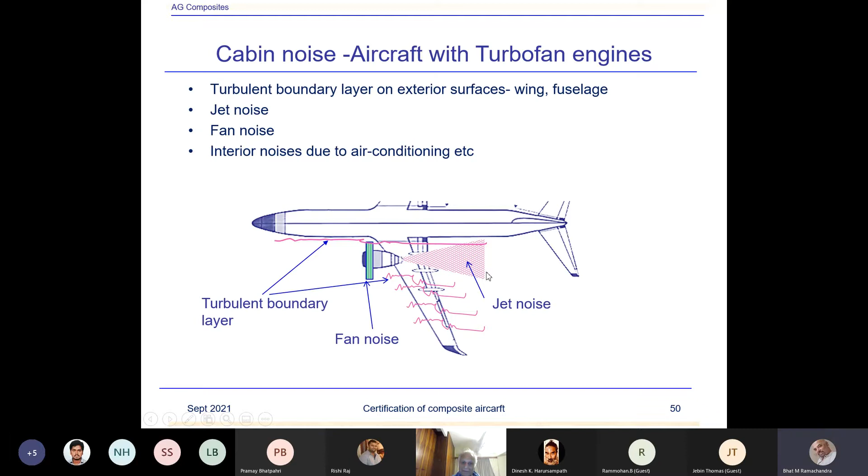Can you just explain a bit about what do we mean by surface density? Surface density is nothing but basically the mass per unit area. So composites will be about 0.7 times aluminum.

So what happens due to this? The skin is getting thinner. This is really quoting the Lockheed work which they had done about 30 years back. Is it about the thickness of the skin or about the area of the surface? Well, surface area naturally means if thickness is coming down, over a unit area the weight also will come down. So naturally that's what surface density means, correct.

So is this noise not dependent only on the area of the surface, but more about the surface density? Well, it is basically surface density, because there's a frequency function—frequency is a function of root K by M essentially. Yes, so that way it is a multiple effect, but this is what I've quoted in summary from the Lockheed work.

This is work which they had done almost 30 years back when investigating composite versus aluminum fuselage. I went into that report, and I can send you the references—there are two references which mention exactly this issue I'm talking about. I've taken only the abstract from that, so it's a real thing which has been done. And what they found was that they had to provide more acoustic lining for a composite fuselage than for aluminum.

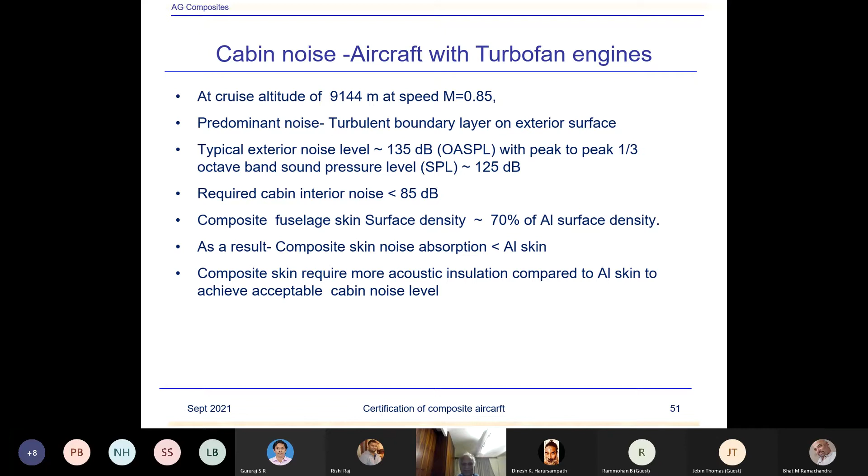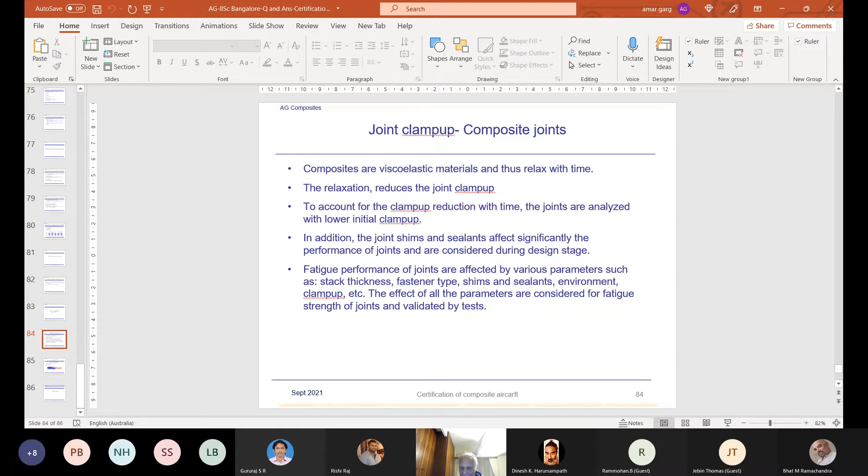The next thing was, someone had asked a question which I would cover when talking about bolted joints. I said the design of bolted joints becomes critical, especially fatigue, which we found more critical, and we have to ensure the fatigue life. After a lot of experience with joint designs, I would always insist any bolted joint in composite should be designed with a fatigue criteria.

That's what we found. The question was regarding a slide on the fatigue issue of the joint - whether it's due to the clamp up. Yes, clamp up, but it's taken into account. When doing static joint analysis, we consider the reduced clamp up, validated by test data. We determine the bearing strength using tests with reduced clamp up, usually around 50%, or sometimes lower.

Based on that, bearing strength level is determined and used in static analysis. But when fatigue analysis is done, fatigue joints are tested, and there's no analysis criteria available. In fact, fatigue life prediction for bolted joints is difficult. You may have to determine empirical relationships to get the fatigue life, based on test data with various parameters.

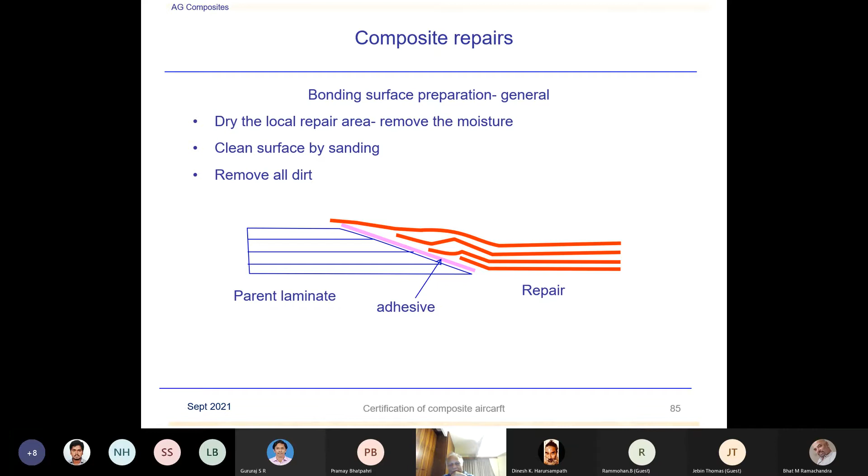That convention I don't remember now, but an appropriate sandpaper will be used to sand it, then remove the dust and lay the adhesive. I can't mention all the processes here, but there are procedures given to the airline for how they will repair when there's damage. I'm not going into the details of this one.

I thought I'll just clarify that. So this is all, unless somebody has questions from the previous lecture before we proceed.

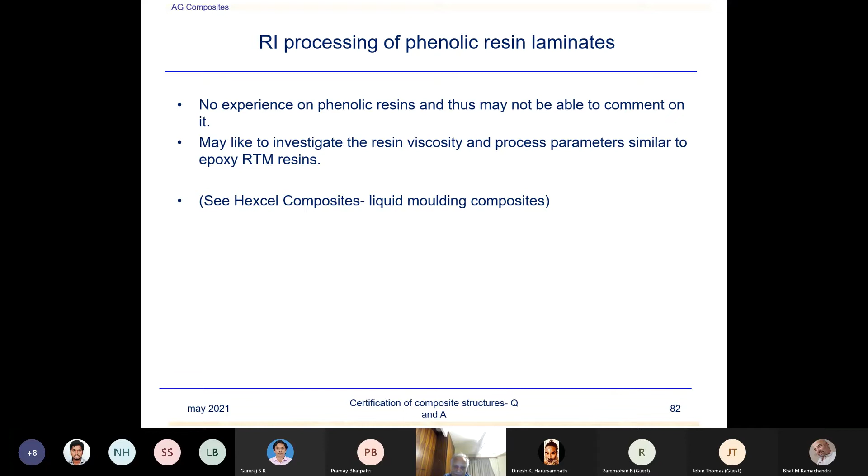No, let me just go to the certification topic. I think last week we had finished up to these various manufacturing defects.

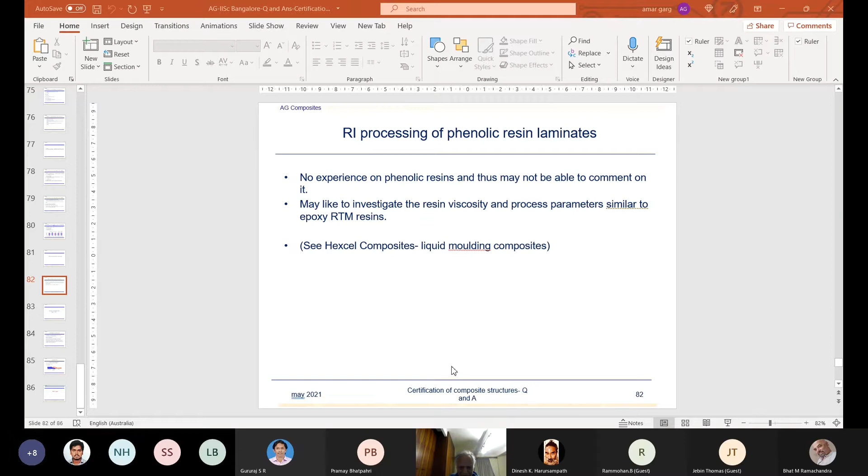Did I cover this slide last time? Anybody? Oh sorry, you can't see - I have to just share this tray. Okay, can you see this slide now? Yes, yes, manufacturing defects. So did I cover this last time? I don't remember.

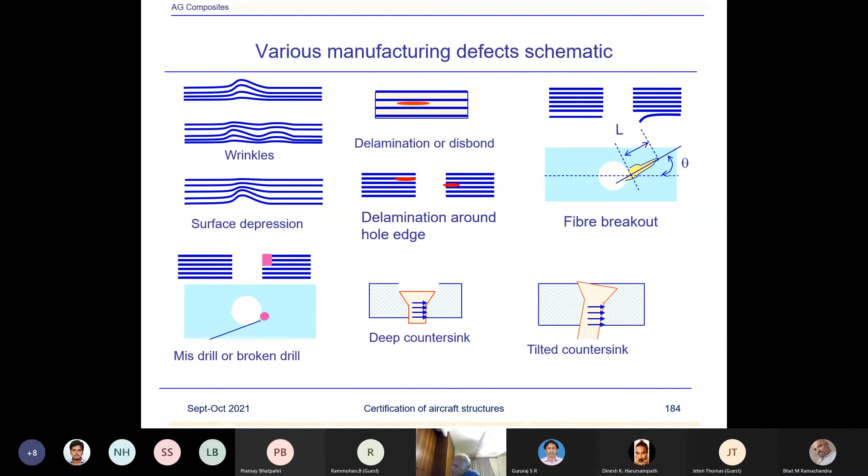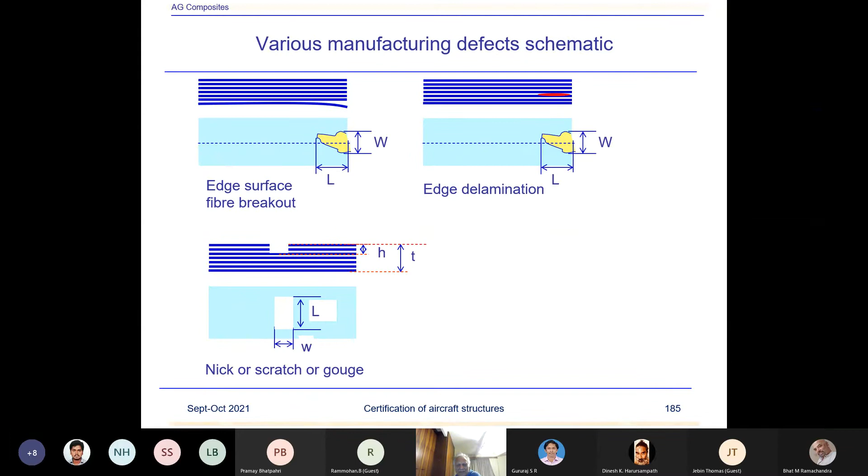Around slide number 190 you have covered, sir. Oh, so I had covered this, is it? Yeah, I think so, because I said okay I'll cover this, start from subcomponent test.

Yes sir, yes sir. Okay, now after finishing the coupons, the levels, coupon, element test, now we consider subcomponent. Subcomponent is basically a detail of a structure involving a few more details compared to what you have with a coupon or element. So essentially it's a bigger item, a bigger part of a structure - subcomponent.

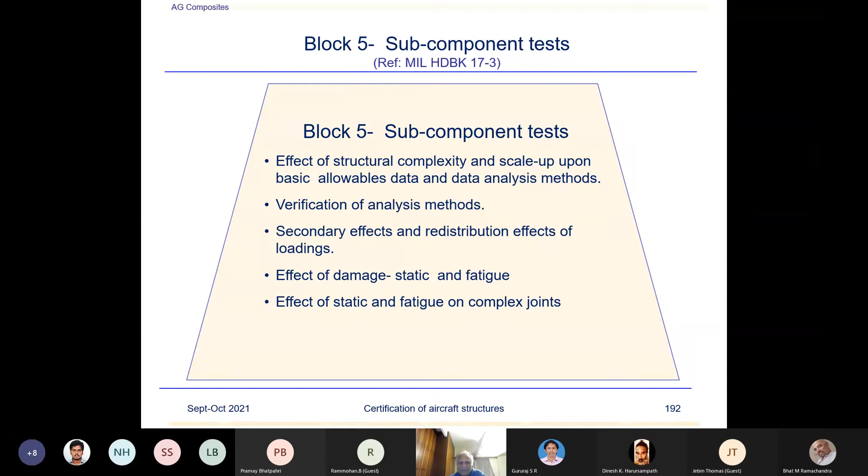So the effect of structural complexity and scale-up upon basic allowables data and data analysis methods, verification of analysis methods, secondary effects and redistribution effects of loadings, effect of damage - static and fatigue - on complex joints. So the first thing I'm trying to discuss here is the lightning strike effect, which is an important part of certification because there's a requirement.

14 CFR 25.581 for lightning strike states that the airplane must be protected against catastrophic effects from lightning. For metallic components, compliance with paragraph A of this section may be shown by bonding the components properly to the airframe, or designing the components so that a strike will not endanger the airplane.

For non-metallic components, compliance with paragraph A may be shown by designing the components to minimize the effect of a strike, or incorporating acceptable means of diverting the resulting electrical current so as not to endanger the airplane. The difference between metallic and composites is that composites are basically non-conductors, while metal - aluminum - is a conductor. That's what makes it a different scenario for lightning strike protection in composites, which have to be protected against lightning strike causing any damage.

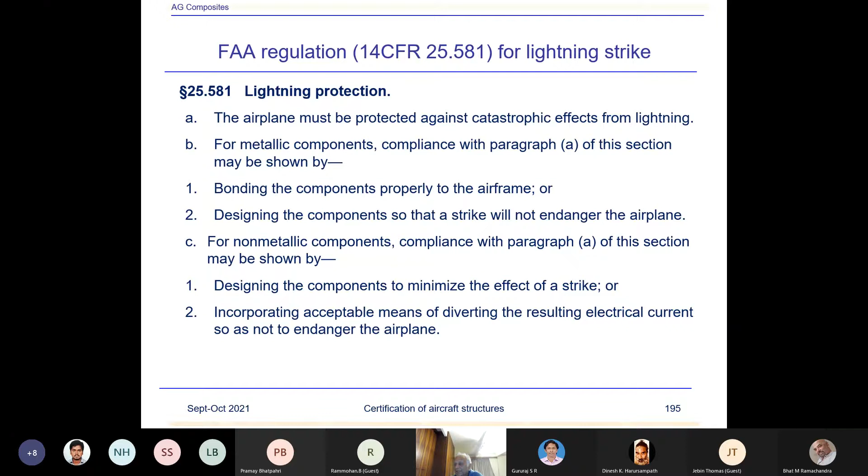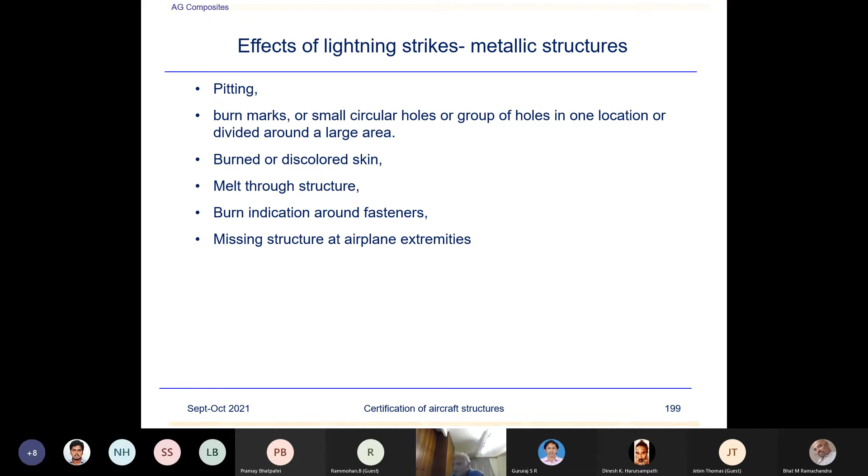The effect of lightning strikes on metallic structure is normally pitting, burn marks, small circular holes or groups of holes in one location or divided around a large area, burned or discolored skins, melt through structure, burn indications around fasteners, or missing structure at airplane extremities. Normally metallic structures don't suffer as much damage as composites.

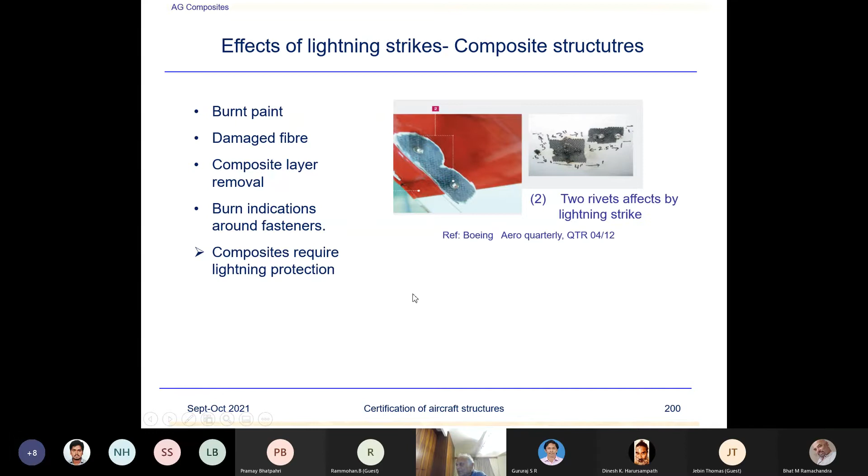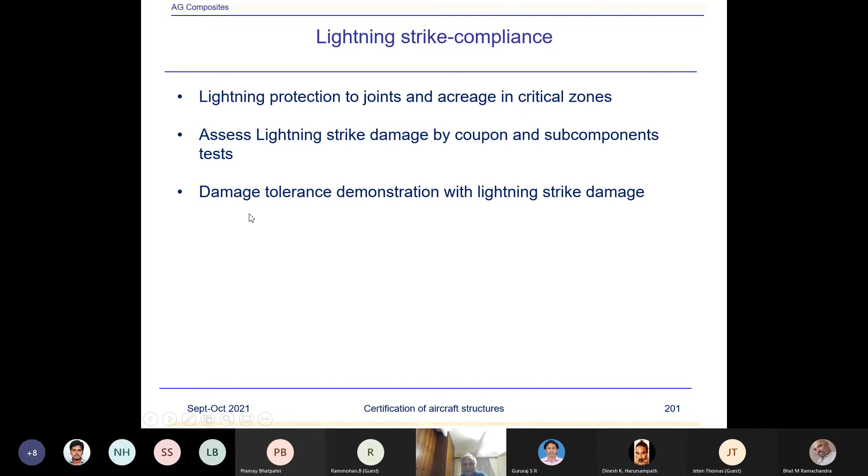Lightning strike compliance is done by lightning protection at joints and acreage in critical zones, assessing lightning strike damage, coupons and subcomponent testing, and damage tolerance demonstration of lightning strike.

One of the key areas of lightning strike protection is the fuel tanks, because fuel is located all around the wing, and there's a strict requirement for lightning protection criteria so that the fuel doesn't burn, because there are fasteners which can conduct and create a flash inside the fuel.

So, lightning strike test - during the 787 program, because this was a new type of structure at the time, we had to perform the test for lightning strike to see what kind of damage it would create. This test was done in Seattle, because in Melbourne we don't have the facility for lightning strike testing.

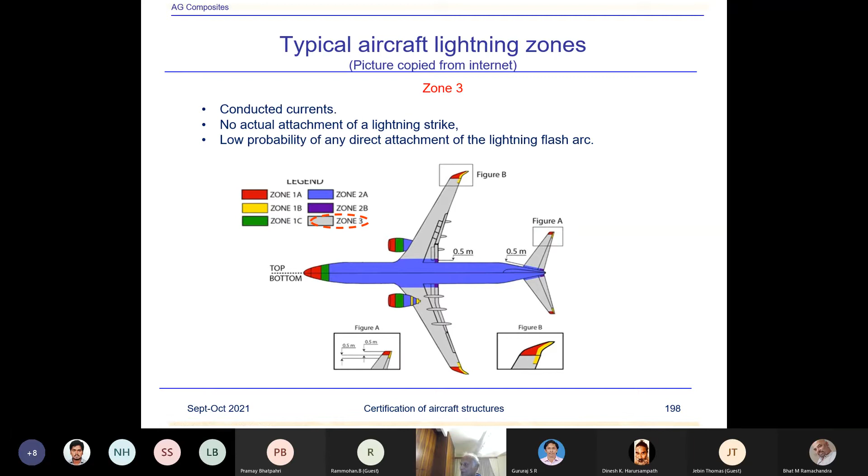In some regions, like these flaps, because they lie in zone 3 which is not a very critical area, no lightning protections were required in the flaps. However, we had to determine, in case something happens, the damage resulting from lightning strike, and also for these fasteners.

Normally, lightning hits and damages the fastener in service. There have been quite a few cases when lightning has affected these fasteners and created damage in the trailing edges of these flaps in service.

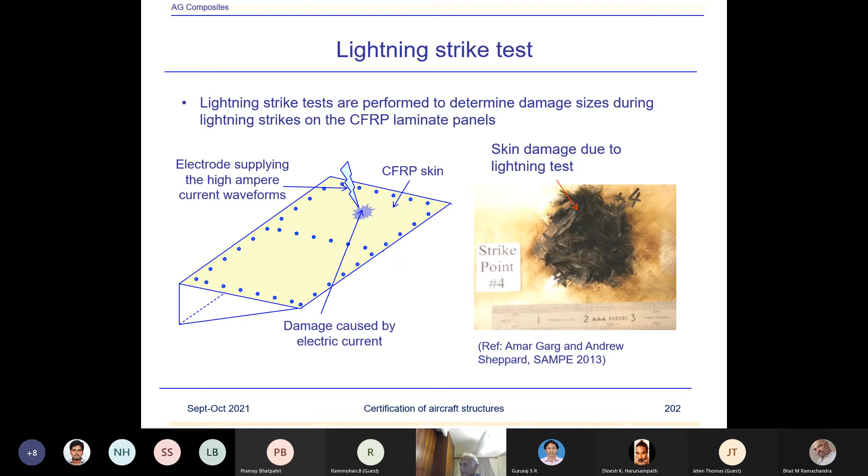So when the damage occurs, the airlines would contact Boeing, or if the damage is within limits prescribed by the repair manual, they will repair it themselves; otherwise they'll go to Boeing and Boeing will provide the solution for the damage repairs.

Next is the bird strike damage. This is a very important part of damage tolerance, and every year some bird strike damages occur for airplanes around the world. I'll just put up a picture and superpose some birds over here - it's not a real thing.

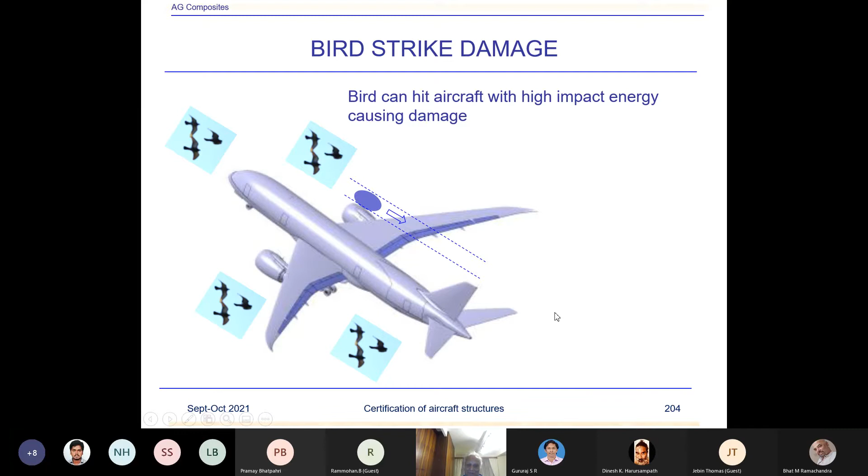Criteria for a bird strike requirement is damage tolerance evaluation: the airplane must be capable of successfully completing a flight during which likely structural damage occurs as a result of impact with a 4-pound bird, when velocity of the airplane relative to the bird along the flight path is equal to VC at sea level or 0.85 VC at 8,000 feet, whichever is more critical.

This has to be demonstrated for the structure, and we had to demonstrate it. I'll show you some slides over here.

Another criteria for bird strike damage, 25.631, is that the empennage - the horizontal tail and fin structure - must be designed to assure the capability of continued safe flight and landing of the airplane after impact with an 8-pound bird. This is double the 4-pound bird requirement, which is a severe damage requirement for that type of structure like the empennage structure.

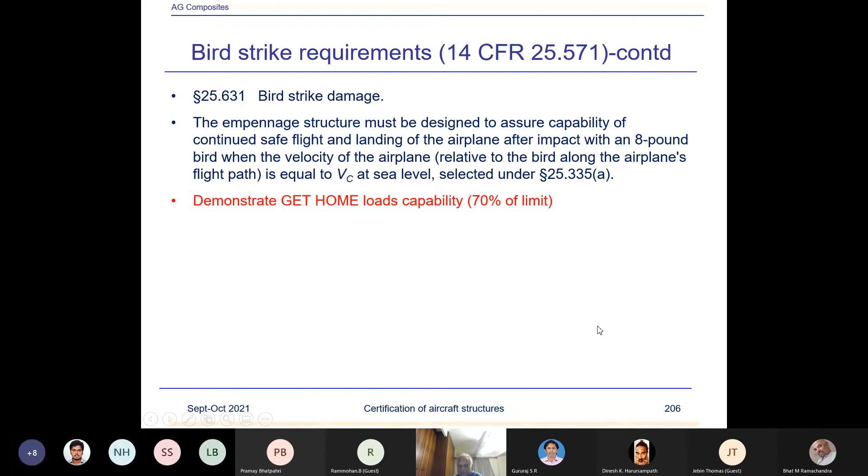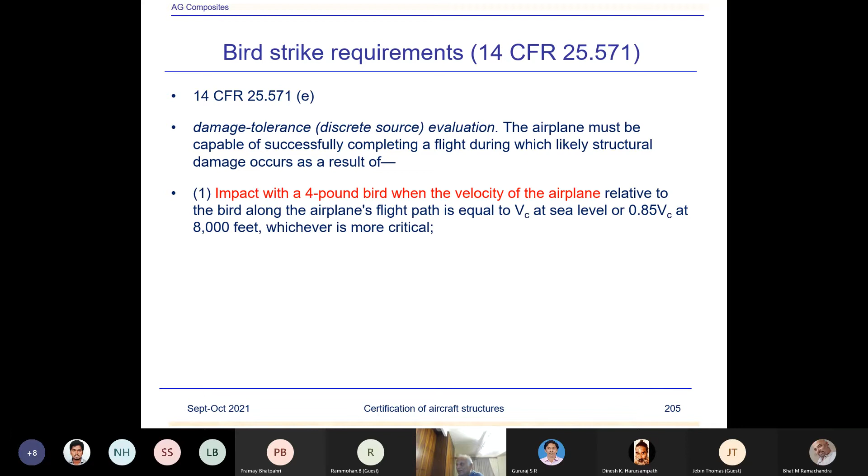So this has to be demonstrated again for empennage structures. For our structures, the requirement was a 4-pound bird. Although, depending upon the case, suppose industry wants to go ahead with a larger bird to show compliance - which is not required by FAA, but to show a bit more safety margin - then probably industry will choose to go higher.

Okay, now, what is the compliance philosophy for bird strike damage? It has to be validated by test.

However, tests are expensive, so a lot of work has been done by the industry and by universities, and some softwares have been developed like PAM Crash, LS-DYNA, MSC Dytran, which simulate the bird strike damages to determine the effect on the structure due to the bird strike, how much damage is created, and what is the remaining strength or residual strength of the structure.

You can just search in the literature and you can find these softwares and a lot of work done by many of the universities and the industry to understand various packages. In fact, recently, Boeing has been doing work for the NASA contract because there's an open literature at NASA website.

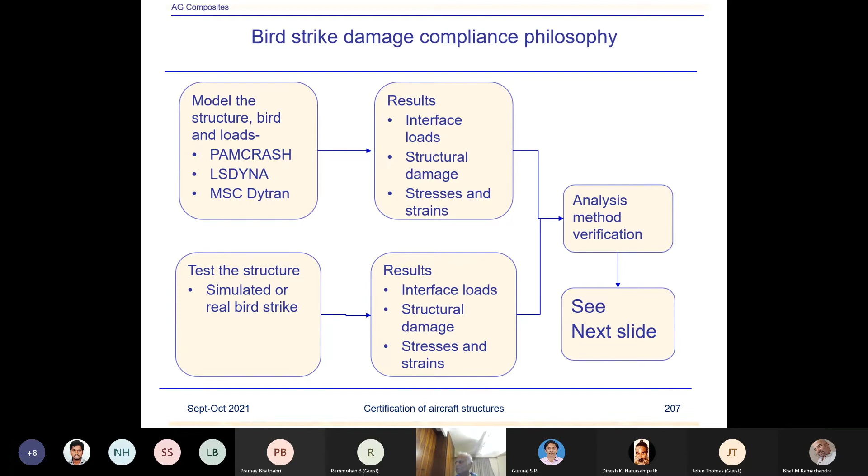Once you have done that, of course, then analysis method verification, then you can apply this method to other zones because you can't test every region of the structure to understand the impact damage due to the bird. See the next slide.

So previous slide, develop equivalent cannonball damage. Now, what cannonball damage is, I'll show next slide. Simulate damage to the structure, residual strength, and margin calculations.

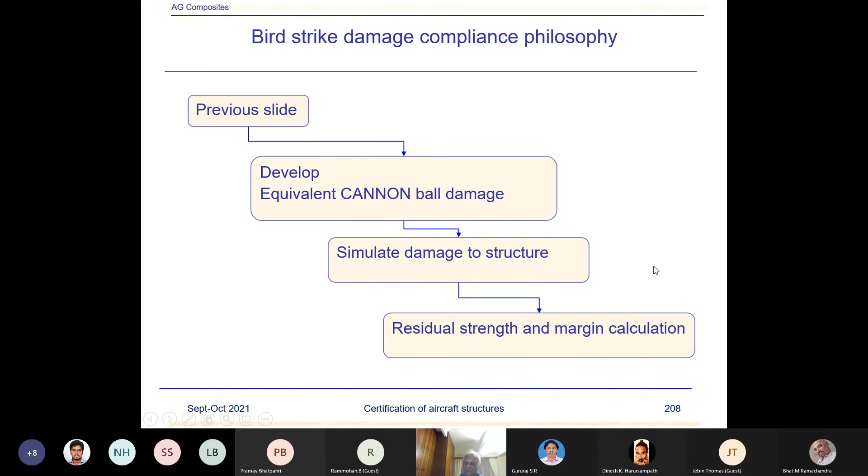Okay, now this work was done by Boeing and the Cooperative Research Centre in Melbourne long back for the 787 program. However, I could present this because it's an open literature, a published material. It was done by my colleague Steve Georgiadis. He's also retired now from Boeing.

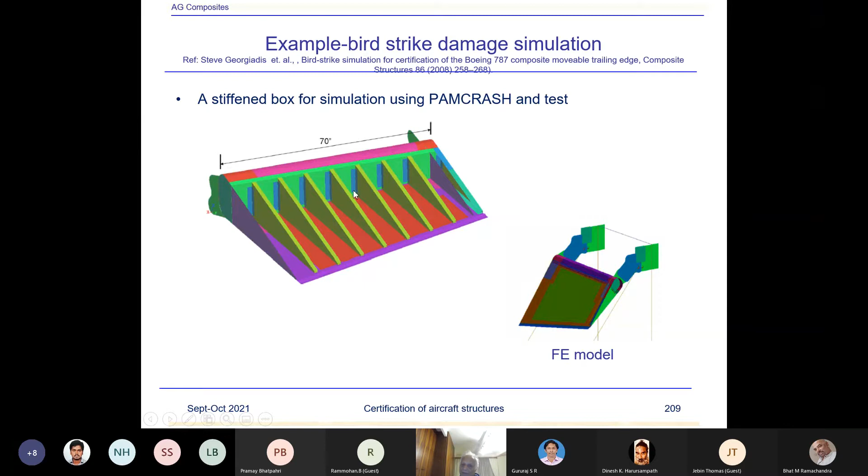So at that time when PAM Crash was used, PAM Crash has been used significantly by Europeans. This was a software used in order to simulate the bird strike damage. So a box, like a 70-inch box with multiple ribs, and the spar was fabricated and modeled also, as you can see over here. And then the test was done in Seattle for the 4-pound bird strike, which was a simulated bird, gel pack.

As you can see here, when the bird was struck, that's a simulated bird. The real damage to this box over here, this is the damage denoted, and PAM Crash simulated damage, you can see. So that was fairly a good simulation by PAM Crash of this damage. Lower skin, this is the damage, and simulated damage. So pretty good correlation they could generate between the test and the software, which provides the confidence in the analysis.

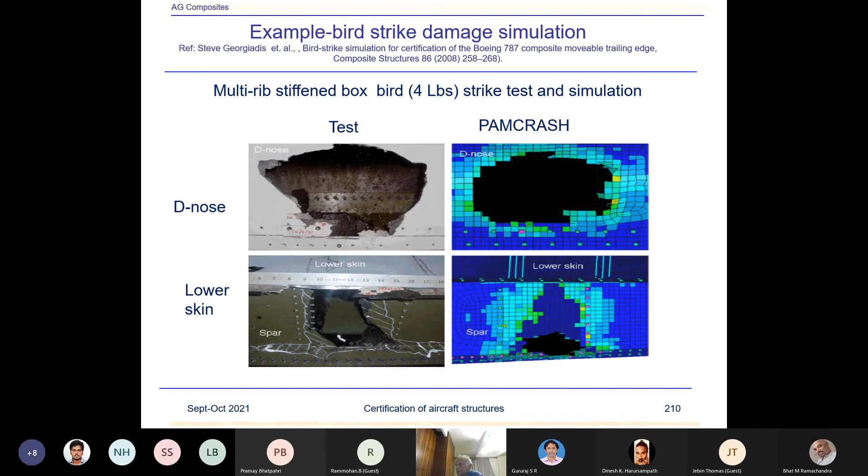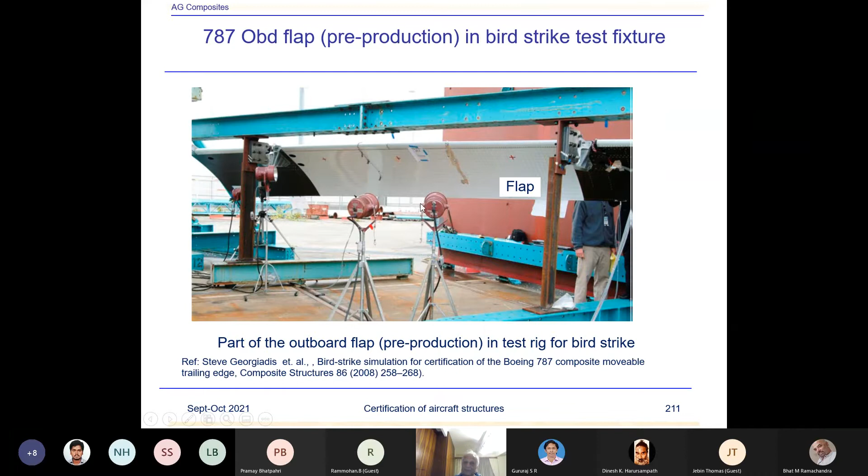I'll show in the next slide, when showing a component, the same flap, another production flap was tested with a bird, the real bird. This was a simulated bird, a gel pack, but I'll show you the real bird test later on.

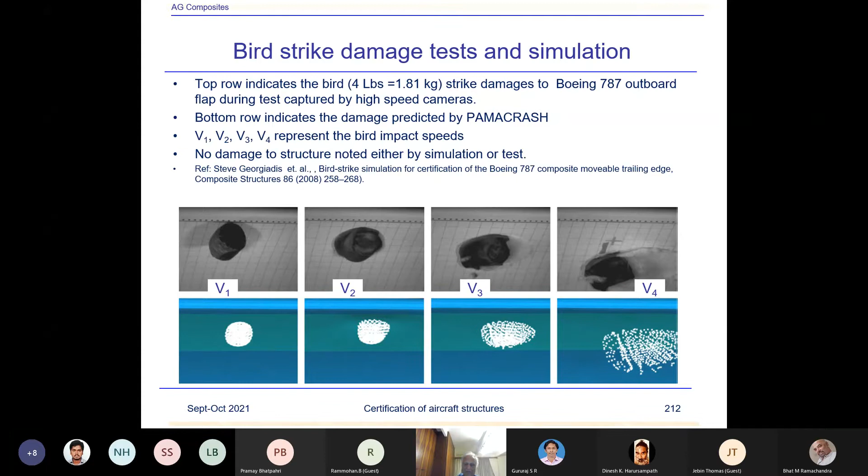In practice, depending upon the probabilities of the angle at which the bird can hit the structure at various angles of attack and bird strike paths, simulation will be done to determine how much structure could be damaged. Suppose the bird hits with greater impact, it just takes away all the material. So this is the cannonball approach: we simulate the known path for different parts of the bird and remove the structure, or simulate the damage created like a cannonball.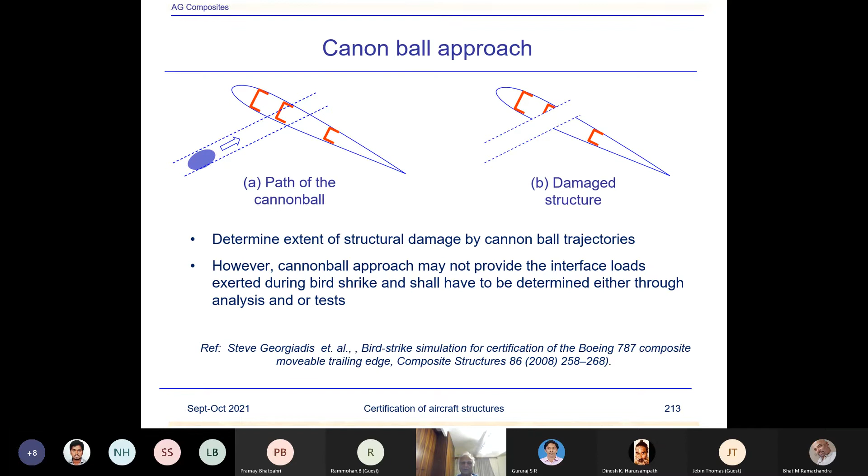Then we analyze it. The remaining structure is analyzed by finite element methods, and you determine the residual strength to satisfy the damage tolerance requirement, which requires 70% of the limit load plus 40% of the gust, all those criteria under 25571E, which I presented in my previous slides in these notes.

Another part of the cannonball approach covers various damage scenarios, basically when the bird just goes away and slips, creating damage at other places. All these scenarios are investigated and analyzed in order to show compliance for bird strike damage to the structure.

This requires a lot of analysis and significant effort, because for each structure you have to model the damage at various places. Considering the flap, we model the damages at various places using finite element methods, because hand analysis or empirical methods can't determine this. Finite element methods remove the structure and then determine the stresses and strain near the damage, using some failure criteria like a point stress criteria, which I'll discuss during my damage tolerance philosophy, to determine the margins.

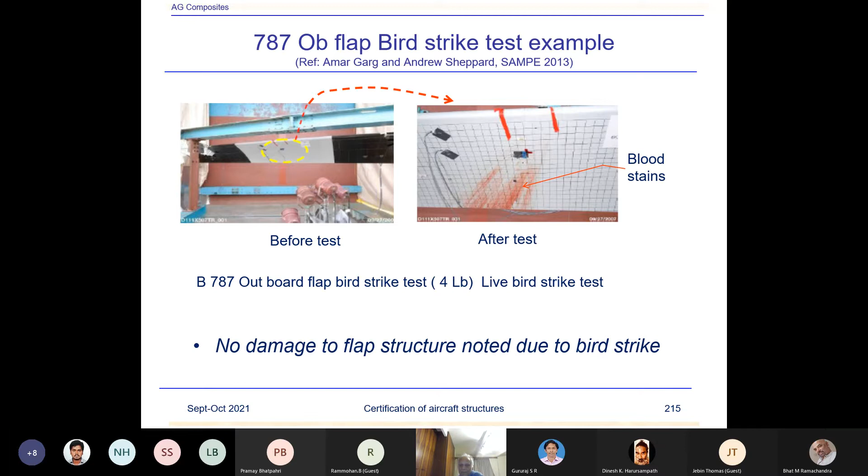Only this outboard flap was tested, and based on similarity of the substructure and structure, other components like ailerons and inboard flaps were also certified. In addition, the cannonball approach was followed to demonstrate compliance of the structures.

Any questions so far from the audience? It's very quiet.

Dr. Garg asked: regarding bird strike effect on a composite structure, by thumb rule, is it most severe when it hits normal to the surface or at an angle, with the same mass and velocity? The response: usually the impact energy will be lower if it is at an angle compared to normal.

So what about the reaction from the structure? Yes, there would be a reaction to the structure, but I can't quantify that, because when the bird hits, it creates an impact, and one has to consider whether it will fail any hinges or fittings. That has to be evaluated through impact energy calculations to see what the reaction change is. I won't be able to give the exact magnitude or effect, but it's an important consideration that the fitting should remain intact due to the large energy created by the bird strike.

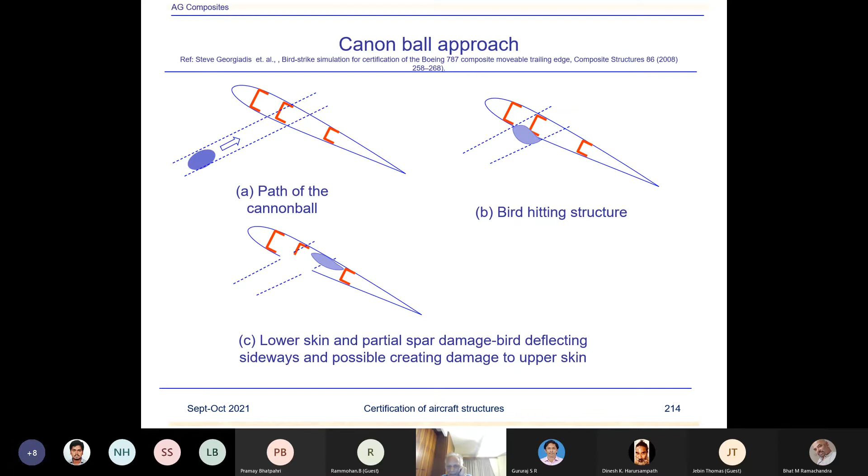The next part is sonic fatigue, the sonic fatigue requirements and strength. It must be shown by analysis, supported by test evidence or by the service history of airplanes of similar structural design and sonic excitation environments, that sonic fatigue cracks are not probable in any part of the flight structure subject to sonic excitation, or that catastrophic failure caused by sonic cracks is not probable, assuming that the loads prescribed in paragraph B of this section are applied to the areas affected.

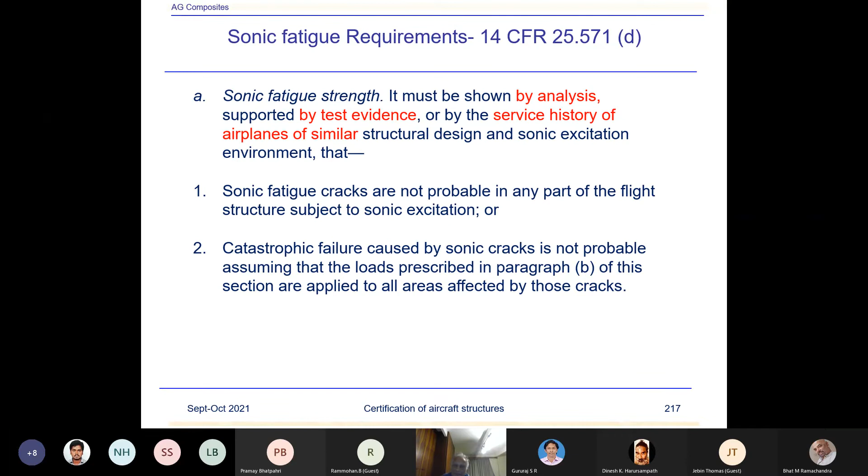Okay, so this is the criteria. Essentially, you have to demonstrate that the high cycle fatigue vibrations do not cause damage to the structure.

We had to investigate sonic fatigue compliance using test data. Essentially it's a random noise, low amplitude, high cycle load, which could run into several millions over the lifetime of the aircraft.

Now, cause and effect of sonic fatigue. For aircraft parts in the vicinity of jet engines, there's noise vibration - high frequency random pressure fluctuations of the acoustic type created by turbulent mixing in high speed jet efflux or turbulent boundary layer. Acoustic loads created by oscillating shock waves, shock turbulence interaction in the jet stream, may radiate high intensity noise.

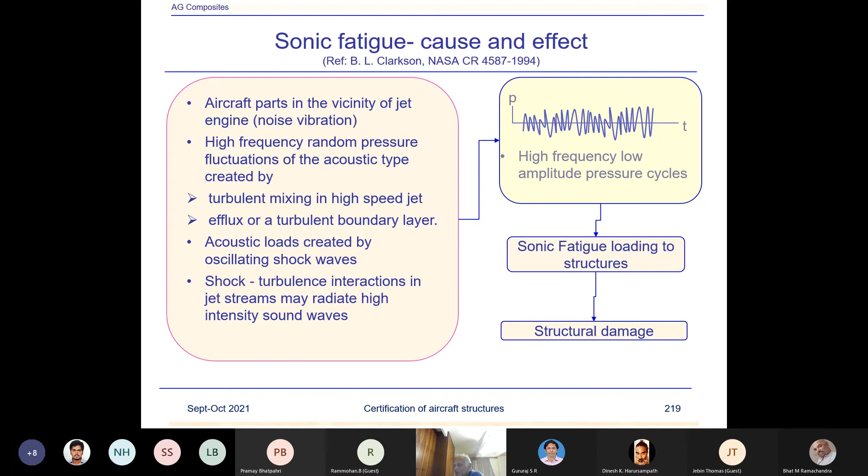Can I just, excuse me, I need some water. Let me just get water. Please go ahead.

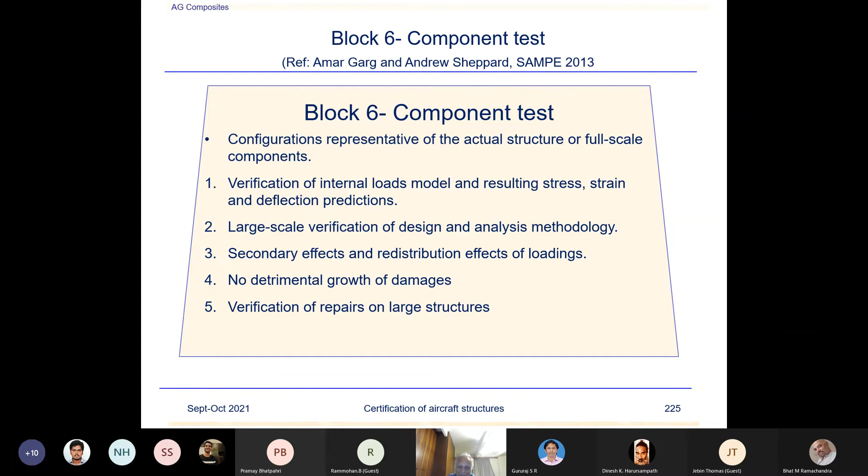So, test article general features. The test article is a production-type article. When the test articles are created, they have to be produced under the production environment, following exactly the production process which will be used for delivering the product to the airlines. There won't be any change in the production process used for testing. So the same process going into production of the component is used.

This simulates the realistic process anomalies, to demonstrate that any undetectable or detectable damage does not propagate or create a detrimental effect on structural integrity. So production anomalies like disbonds and delaminations were created at the time of manufacture, because that is a compliance requirement. We have to consider any damage which is undetectable that could occur during production, like delaminations or disbonds, and then incorporate BVIDs and VIDs - barely visible impact damages and visible impact damages - to validate no damage growth. That is a criterion of the structure.

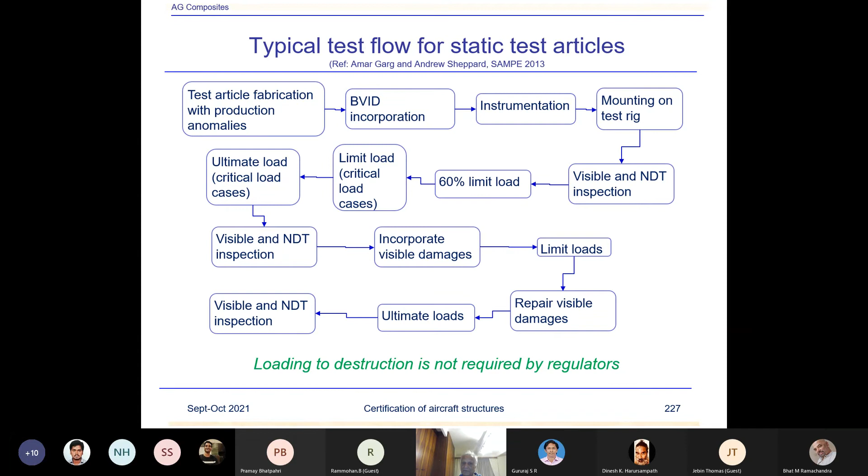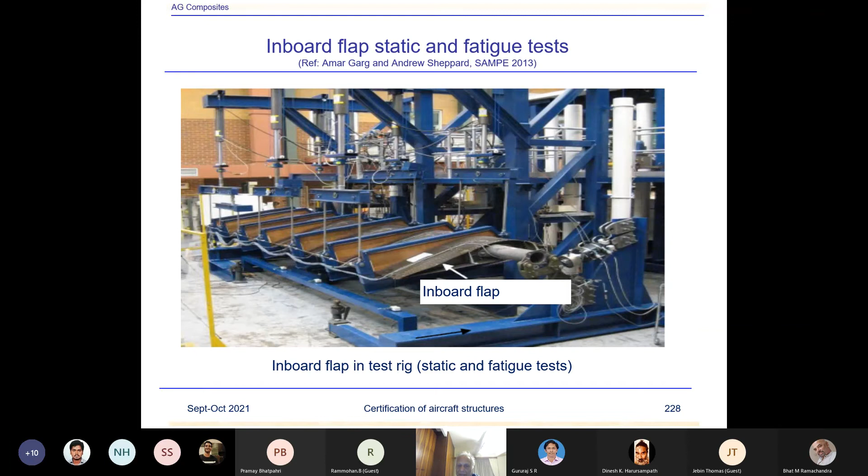Okay, now, so what do you do? This component was installed with dozens of strain gauges on the skins. Some gauges were back to back also to demonstrate the buckling. Then LVDTs to read the deflections.

And the results are for a certain gauge. This is just some typical reading, one slide I've taken from our actual structural data which is published. We could not show the real strain values here, we were not allowed to show any strain. So what you can see here is the test versus analysis.

Predictions of skin strains agreed well with test data, verifying the analysis methods. The requirement was very stringent about matching the strains of the test data to the analysis within plus minus 5%, which is not easy, let me tell you.

For a larger structure you are analyzing, the skin strains could behave quite differently in your analysis than in the test. Right. So what happened really during the analysis and testing program? We got the test data, and test data in some locations were deviating more than the required matching agreement between the test and analysis by more than 5%.

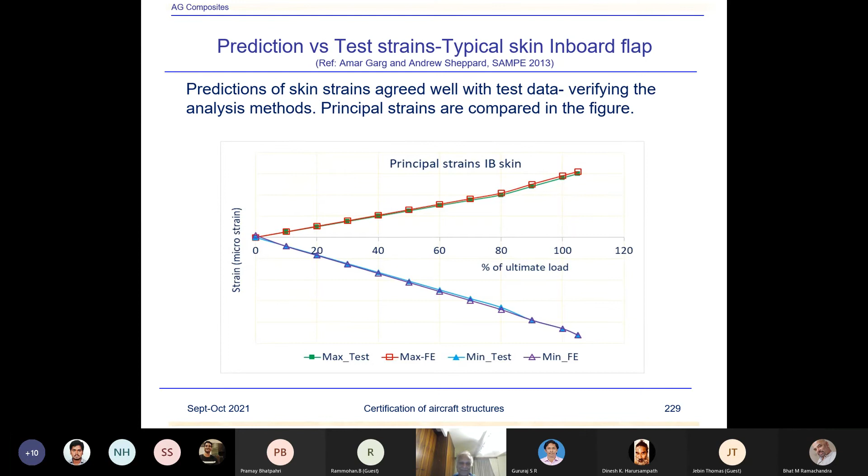Next one, the displacements. Using LVDTs at various locations, the trailing edge and leading edges, because you predict the deflections using finite element methods, and then using the test.

What happens when you are using a finite element analysis? There could be differences because the stiffness which you are representing using the finite element methods may not be exactly the same. The laminated stiffnesses could differ from one point to another, and that will change the deflections.

However, again, the requirement was within plus minus 5% for the FAA requirements. Engineers had to work in order to match the stiffnesses exactly to what the test was showing versus the analysis. And you can see the result, they're pretty good.

So our engineers at the time had done a remarkable job in analyzing the sophisticated structures and matching the test data to provide full confidence in the analysis methods, which is an enormous task.

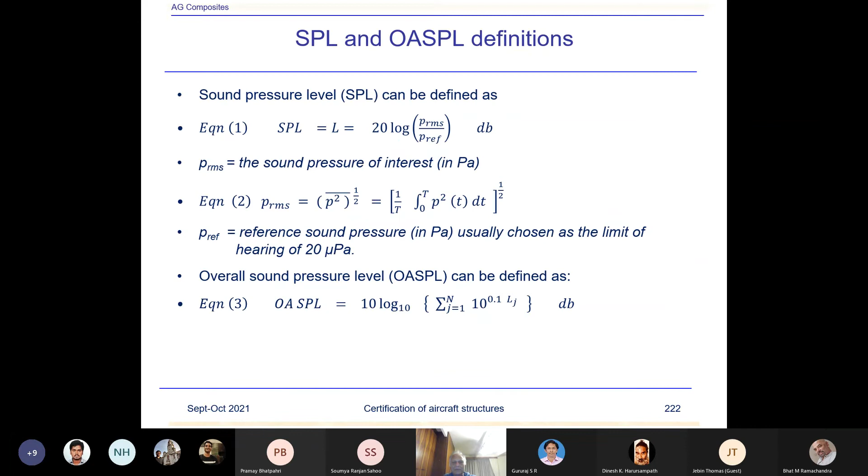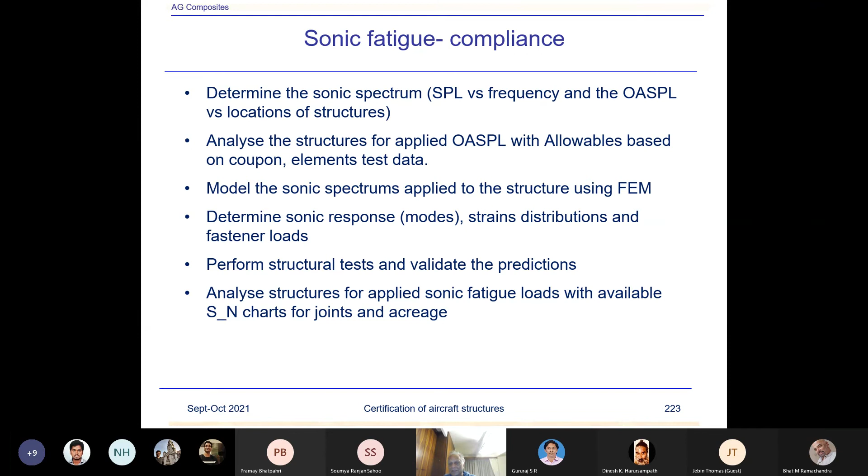Because analysis-wise, what happens in sonic fatigue, actually I have not put any details over here because there was no time to put lots of details, I've taken it away. So essentially, sonic fatigue, say, suppose we are dealing with this flaperon over here. Due to this, it creates vibrations. Now these vibrations which are there, low pressure, high cycle vibrations, it's a fatigue loading essentially. So you have to generate...

using a sonic spectrum the amount of loads which are being created. Fatigue load is essentially converted to the fatigue load, the pressure distribution in various zones. And that fatigue load is compared for the fatigue endurance limit using the stress fatigue diagram, stress cycle diagram.

I could provide some notes in the question answers next week to discuss a few more details. But there's a lot of work in this sonic fatigue compliance.

But imagine a situation, it's like a mechanical fatigue. We have the loads, so you generate from this sonic fatigue the loads, you convert these pressure cycles, or what we are calling sonic OASPL. So in terms of the loads, it can convert to pressure distribution or this stress. And number of cycles for which you have to show the compliance, and then compare with the SN chart if you have for that part, for that high cycle fatigue. So essentially, it's a fatigue problem.

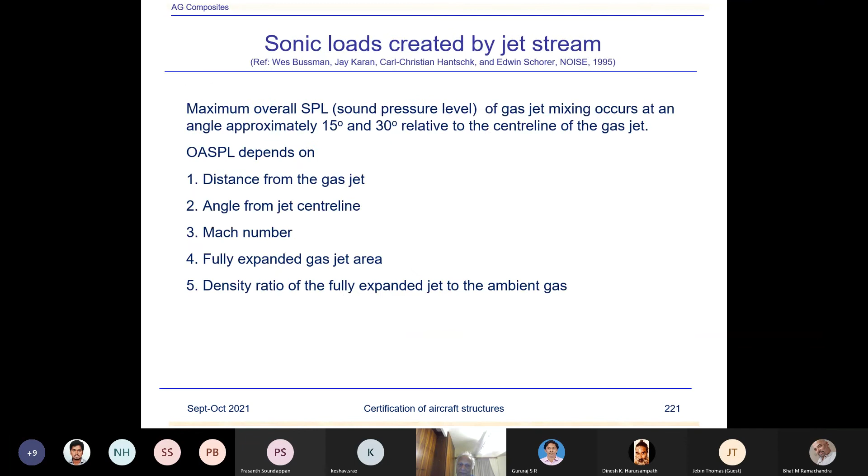So these tests were done considering the overall pressure, sonic pressure levels. I said I can send some reports, NASA references on sonic fatigue, if somebody is interested, high cycle fatigue.

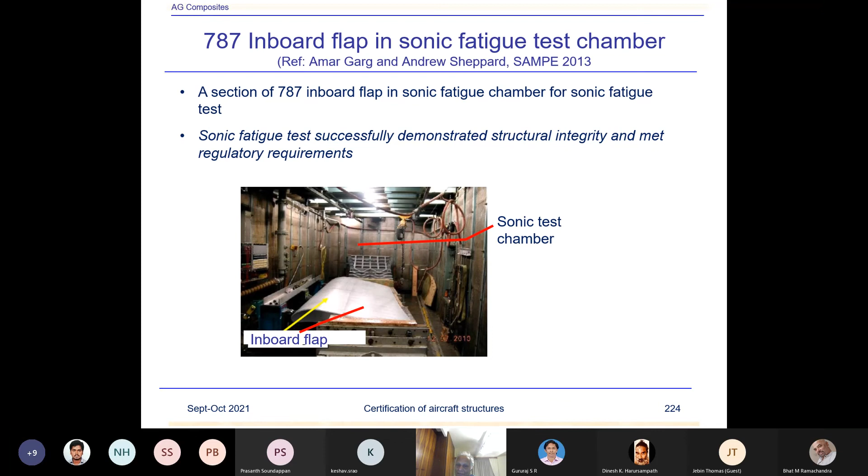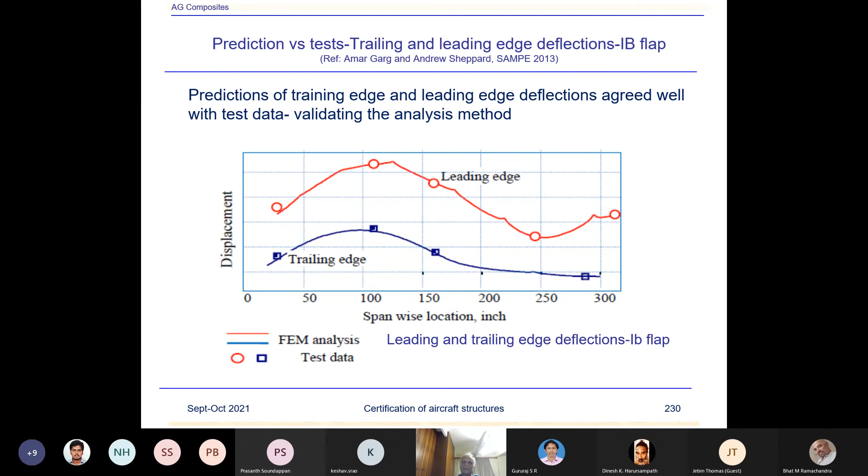So I was discussing this, and essentially what I said, that analysis confidently showed that the test matched the analysis data, so confidence.

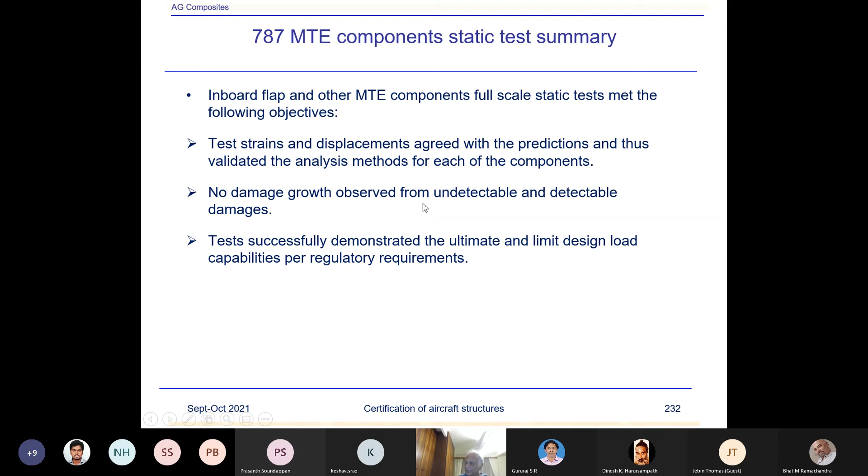Capabilities per regulatory requirements are satisfactory. They satisfied all the compliance requirements.

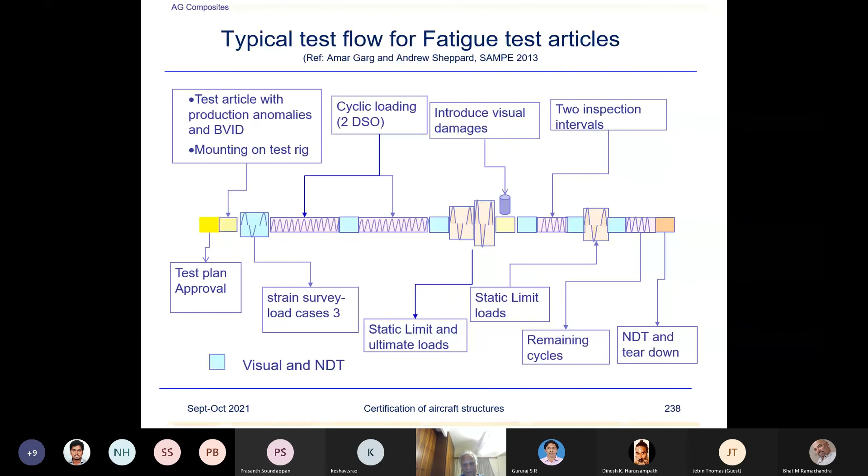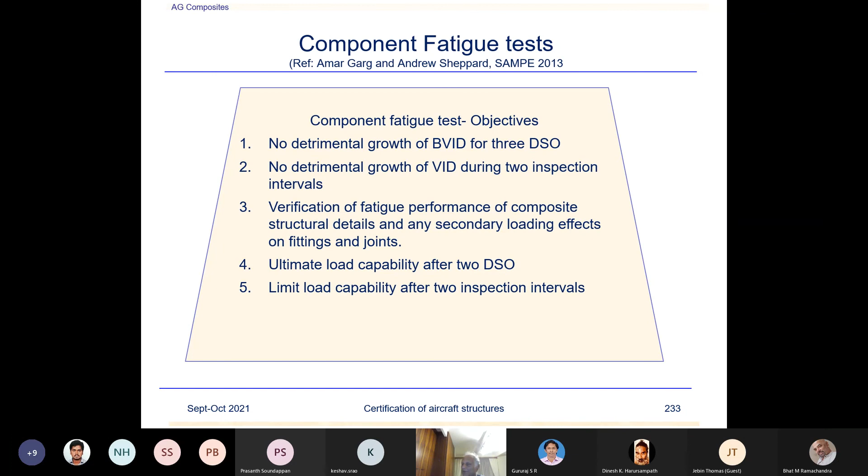Fatigue test showed no detrimental effects. I think this may require a bit more discussion on fatigue, so maybe I'll spend about half an hour next week to finish off this fatigue test. I can stop here today and invite questions if anyone has any.

Any questions? Dr. Garg: Yeah, yeah, a fantastic series of lectures on all these topics, very valuable and not easily available elsewhere. So thanks for this.

I have a general question. All these aspects covered so far refer to the MTE, the movable trailing edge, I presume. Is the philosophy more or less the same for other structural and composite components, maybe with a little variation here and there? Response: the compliance philosophy is the same. I picked this example because I worked on this MTE structure, but the certification philosophy for wing, empennage, or fuselage is similar - same requirement.

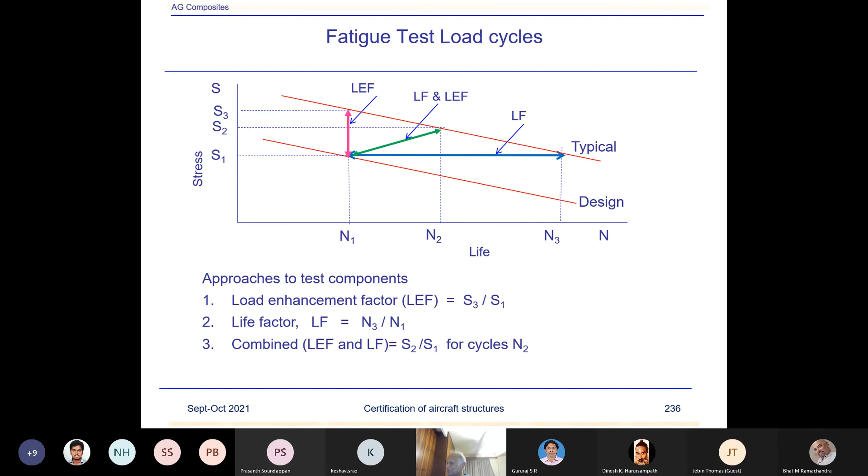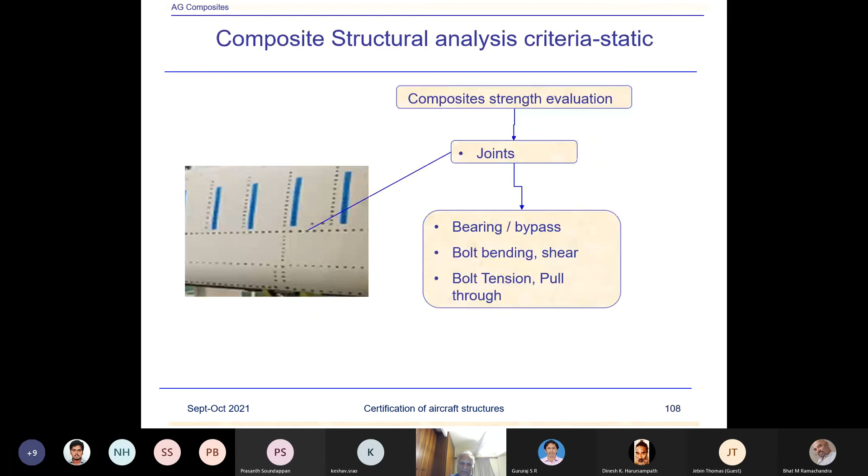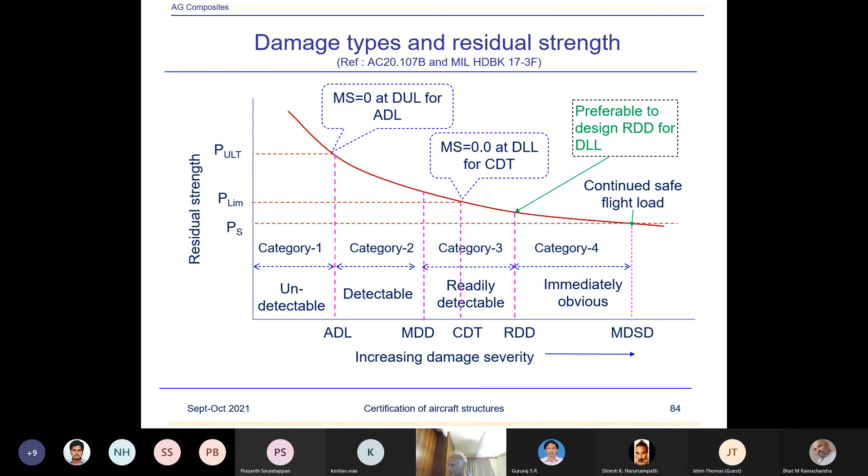Essentially, the main requirement comes from damage tolerance, which is what I've covered here. Let me go back to this diagram - essentially we have to cover whatever structure, demonstrating the structure's capability with undetectable, detectable, and immediately obvious damages. This is what I've tried to cover in this lecture series - that certification philosophy is to show the safety of the structure, and safety of the structure is from the damage tolerance point of view.

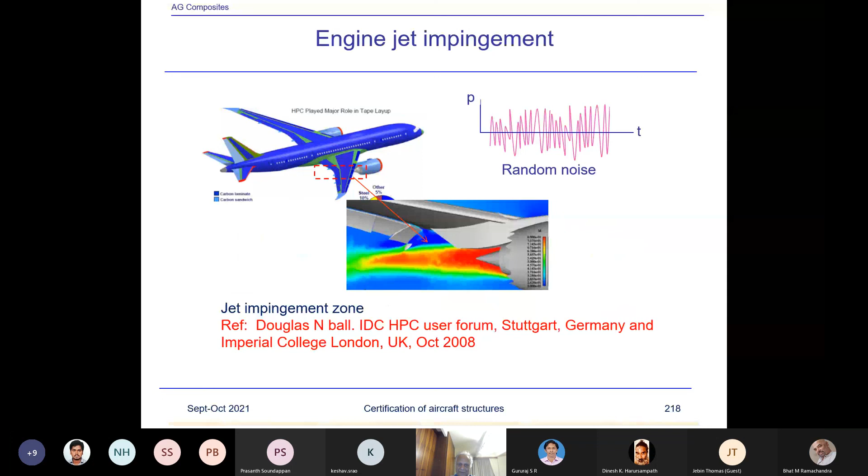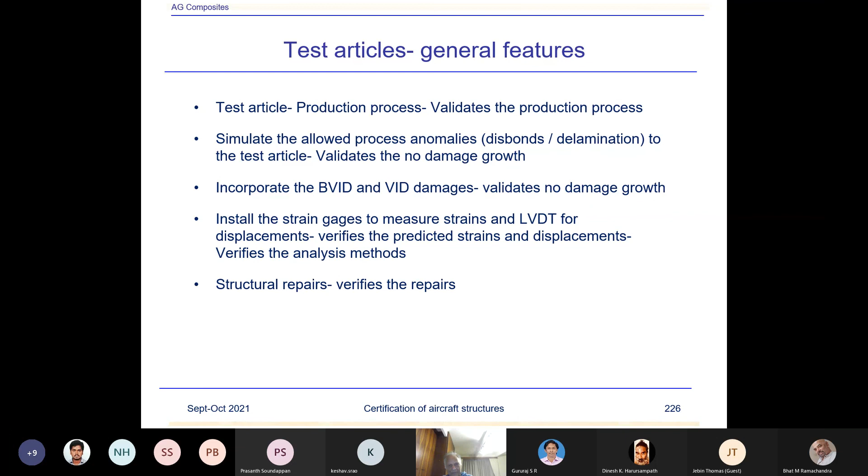Any other questions? One action item on me is to put some more details for sonic fatigue, and I'll send some literature on that - cabin noise.

Anything else? Any other questions? One quick question, Dr. Garg again - we were talking about visual inspection and NDT inspection. I work in NDT. I was wondering if we have more information on which methods are of high importance or utility - is it ultrasound contact method, or eddy current, any idea on this?

Well, generally on composite structures we don't use eddy currents - it's mainly ultrasonic testing. Various different types of ultrasonic inspections are done to detect damages. These methods have the limitation that you can't detect damages below a certain limit, like a quarter-inch delamination or disbond, not a hole. That's why an undetectable disbond is usually considered as a half-inch by half-inch defect, which remains undetectable as a disbond or delamination inside the laminate.